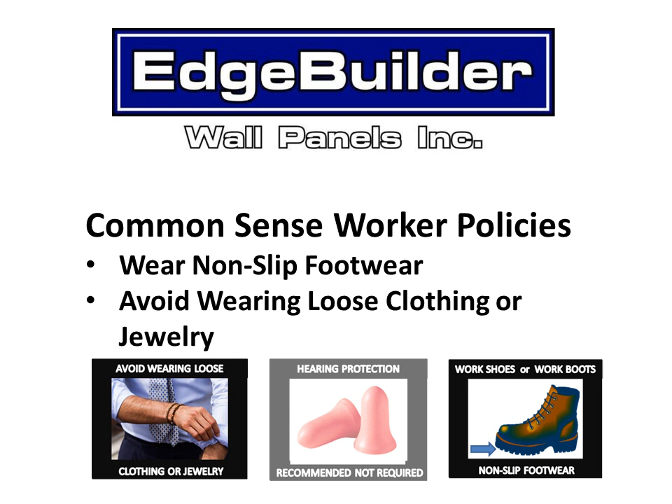On our shop floor, we have 3 one-ton bridge crane stations. As an employee of EdgeBuilder, operating any one of these stations presents some risk of injury to yourself or others in the station area. For safety reasons, only designated employees trained by a qualified or competent crane operator can use these stations. At EdgeBuilder, to become designated, first-time users of the bridge cranes should do so only after proper training and review of its use with the floor supervisor.

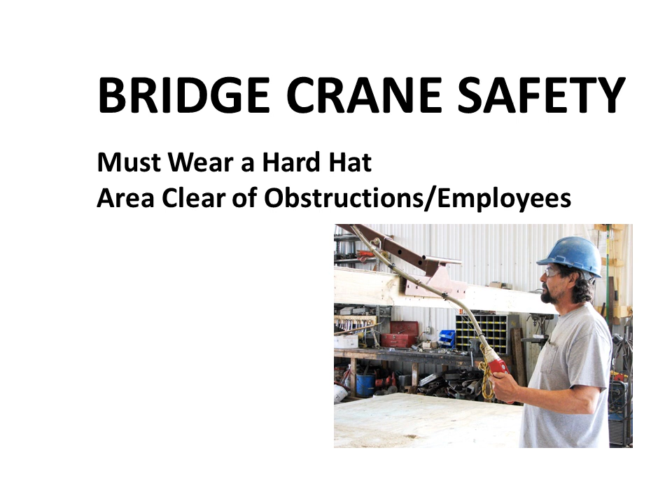With tons of wall panels being craned each work shift, let's walk through the safe use of bridge cranes at EdgeBuilder. Because wall panel loads will be hoisted more than 5 foot high, anyone in the crane's lifting range must wear a hard hat. Before crane operation begins, the first step is to complete a visual inspection of the working area. Make sure the path the wall panels are to be moved is clear of obstructions and any employees nearby are out of the way.

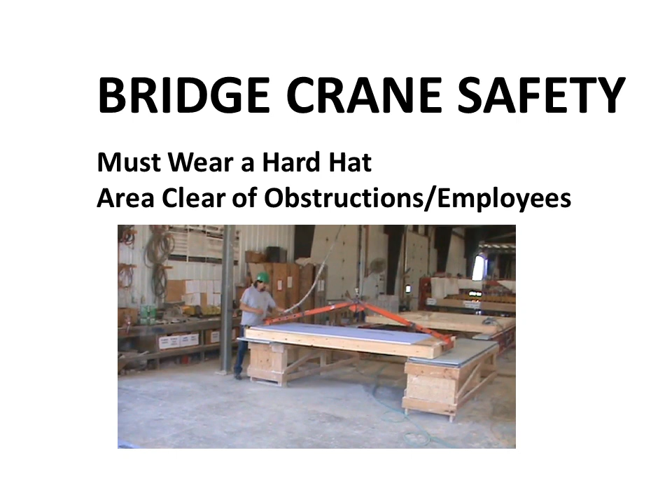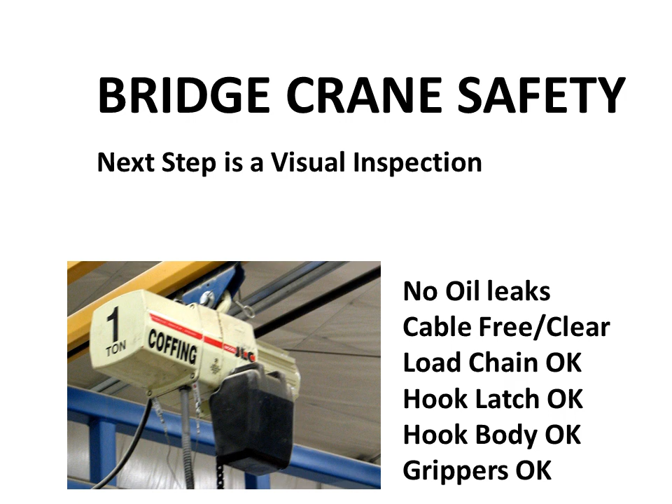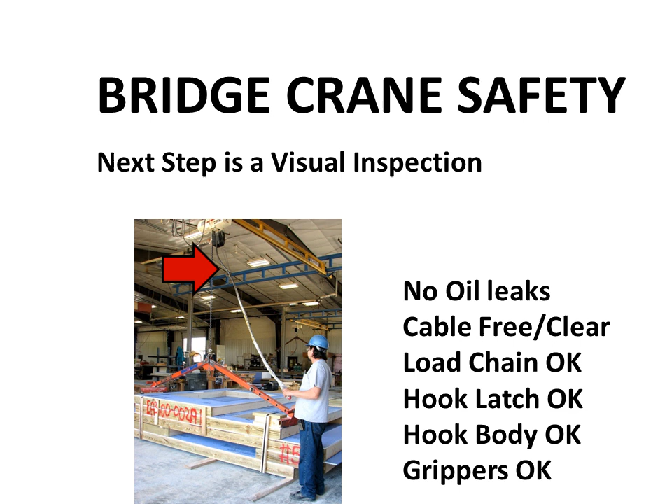Once the area is clear, the next step is to do a visual inspection of the crane components. Start by checking out the hoist body, looking for fluid leaks. Evidence of a fluid leak can be found with oil marks on the shop floor underneath where the crane hoist has been parked. Next, make sure the push button station cable is free and clear and not wrapped around the hoist or load chain. Visually check the load chain links to make sure they are uniform in appearance, free from kinks, and there is no evidence of wear.

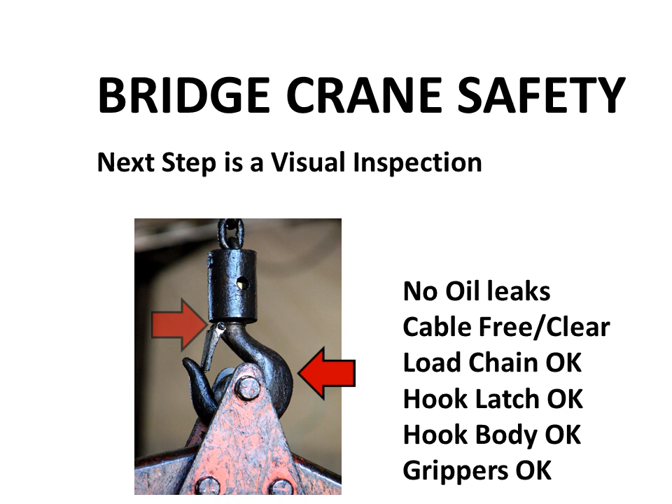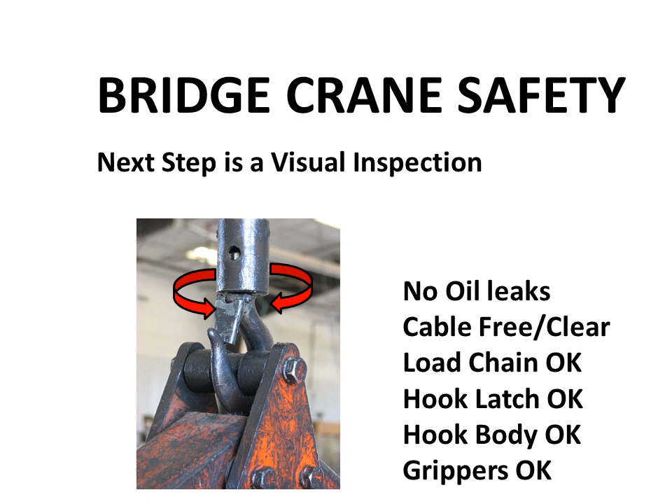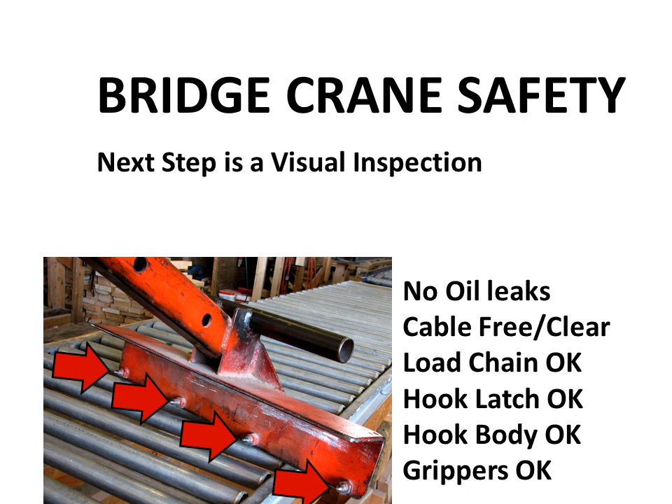Make sure the hook latch is set properly and there are no cracks, bend deformations, or weld marks on the hook body. The panel lift should set properly with the saddle of the hook and should spin freely without any hang-ups. At the end of the panel lift arms, inspect the grippers to make sure none are worn, loose, or missing. If any of these items look out of the ordinary, do not operate the crane and contact the floor supervisor immediately. The next step is a quick check of the station control buttons. Briefly raise and lower the crane without a load attached to verify that all the buttons are functioning correctly.

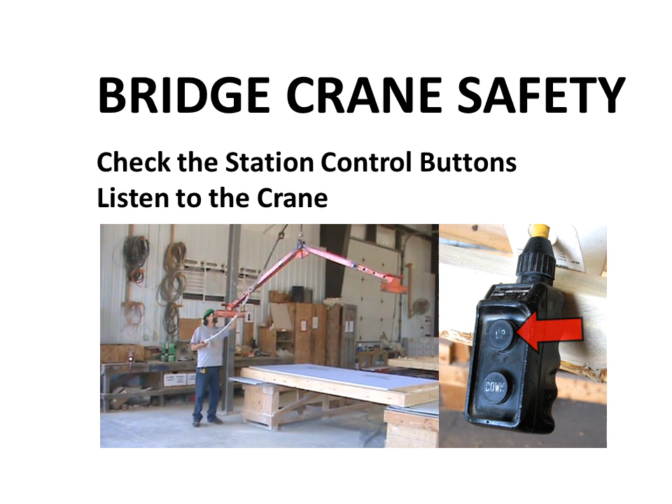If the buttons are sticky or operate opposite than indicated, let the floor supervisor know immediately. At the same time, listen to the crane during this test. If anything sounds out of the ordinary, contact your floor supervisor.

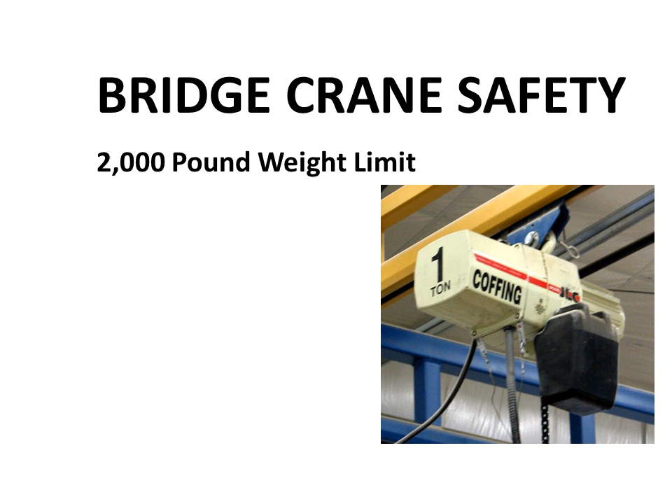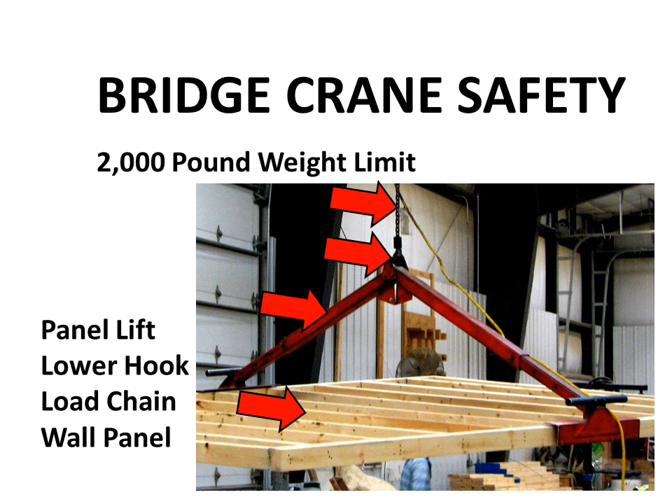With the visual inspection completed, the next step is to determine that the wall panel to be lifted is a safe working load under the 2,000-pound limit of the hoist. Remember that the 1 ton or 2,000-pound limit includes the combined weight of the 150-pound panel lift, lower hook, load chain, and wall panel. The bottom line is if you are not sure or question a heavy load to be lifted, do not lift it. Instead, contact the floor supervisor for further instructions.

Critical to safe lifting at EdgeBuilder is the correct sizing of the panel lift arms. They are adjustable to fit wall panels between 7 to 12 feet in height. If the lift arms are too long for the wall panel to be lifted, the grippers will not hold and you are at risk of prematurely dropping the load.

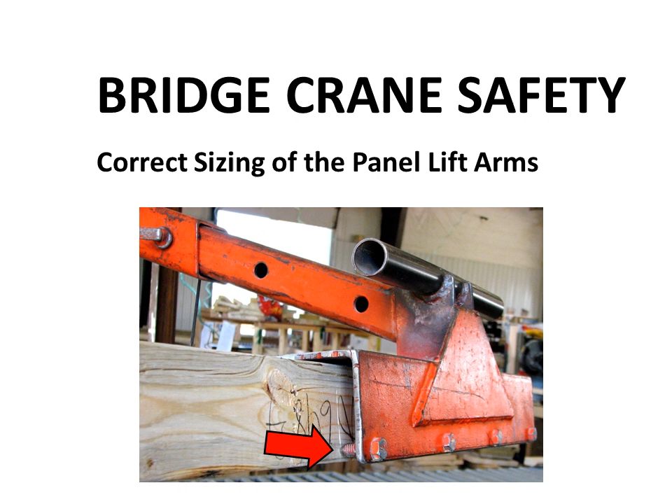Shown here with the panel lift arms correctly adjusted is a close-up of the gripper securely holding the load. If the load you are trying to crane looks any different or you are unsure for any reason, contact the floor supervisor to verify the proper arm sizing before proceeding with the lift.

Next, maneuver the panel lift directly over the center of the wall panel to be hoisted. Now lower the panel lift so that the gripper holds completely rest against the top and bottom plates of the wall panel as shown in the video. With your hands free and clear of the gripper holds, raise the load several inches and stop.

Before moving the load any further, this is the point where several judgment calls are made. First, does it appear that the grippers are securely holding the wall panel? Secondly, is the load balanced? If not, lower the load, adjust the placement of the panel lift, and raise the load again several inches. Repeat this process until the load is balanced.

To move the load, press and hold the up control button. Don't feather the control buttons as this will cause the load to jump up and down, risking a premature load drop. Release the up button when the wall panel load reaches a height that will clear all obstructions, but not higher than necessary. Then pull the load in a straight line to your destination point without swinging the load.

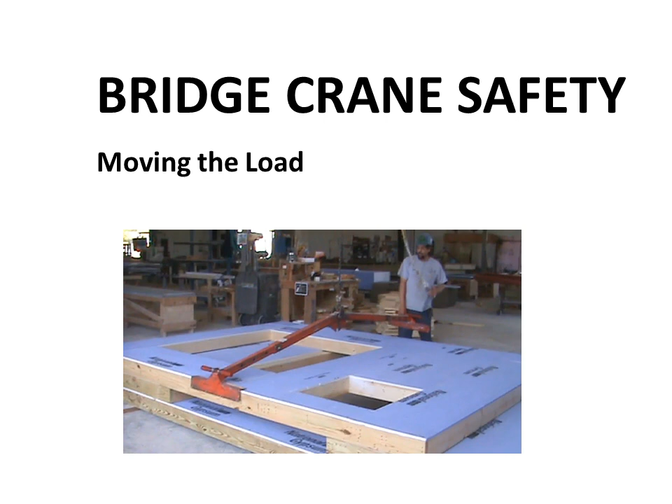Important: never move the load over the top of you or others. When transporting the load, stay focused on the task at hand and don't carry on a conversation with others. Once the destination is reached, reverse the process by smoothly lowering the panel into its place. Then return the panel lift so it is safely out of the way, ready for the next lift.

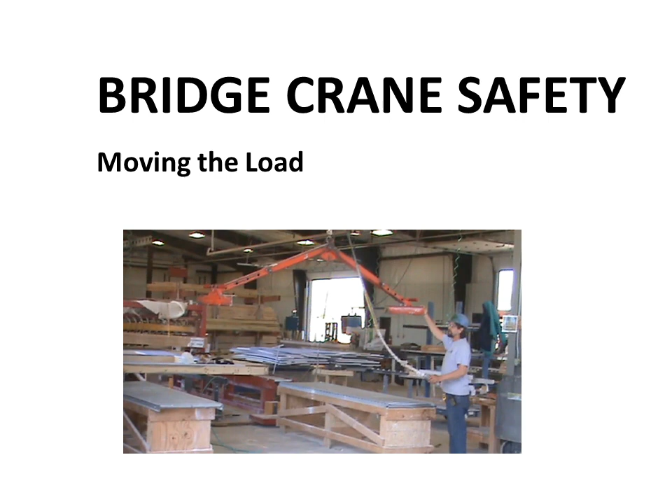Here are some do's and don'ts while operating the overhead crane. Do check for lockout tagout tags before operating the crane. Do report any malfunctions, unusual performance, or damage while operating the crane immediately. Do maintain firm footing while operating the crane. Do know the location of the electrical power panel should you need to shut down the crane in case of an emergency.

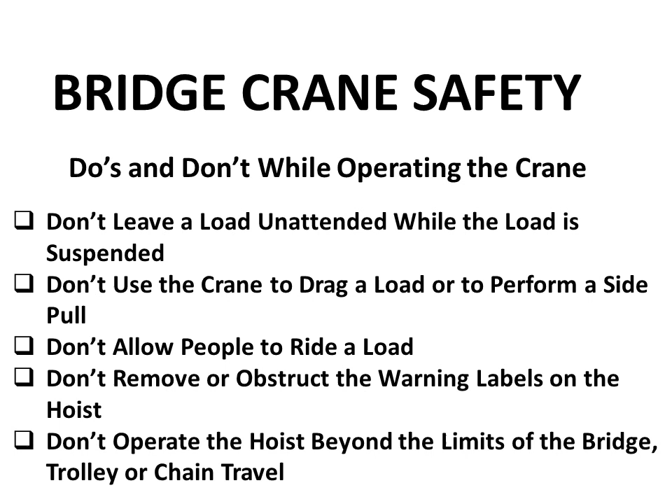Don't leave a load unattended while the load is suspended. Don't use the crane to drag a load or perform a side pull. Don't allow people to ride a load. Don't remove or obstruct the warning labels on the hoist. Don't operate the hoist beyond the limits of the bridge, trolley, or chain travel.

This completes the overhead bridge crane safety training video. At EdgeBuilder, employee safety is a priority. In this presentation, we reviewed the process of safely using the overhead bridge crane workstations and common sense EdgeBuilder worker policies. If you have any questions on the use of the overhead bridge crane workstations, please contact the floor supervisor.